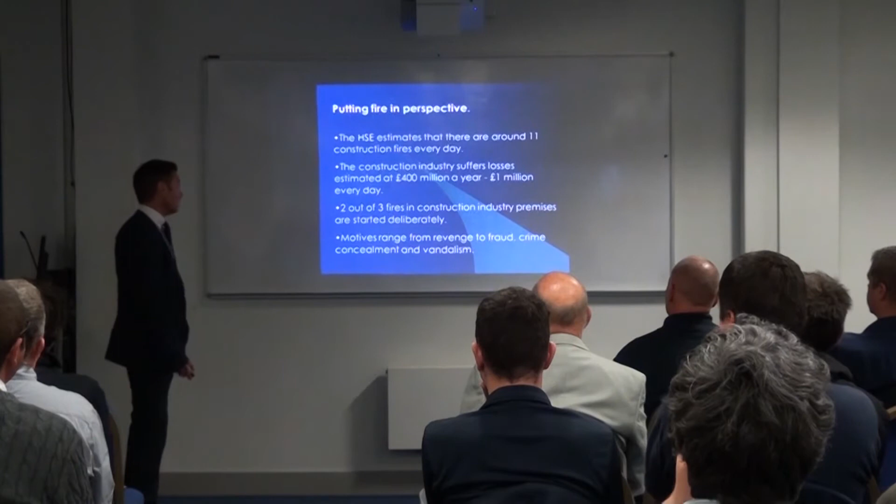So, putting fire into perspective. The HSE estimates there are around 11 construction fires every single day. The construction industry suffers losses estimated at 400 million a year, which is 1 million every day. And 2 out of 3 fires in construction industry premises are started deliberately. Motives range from revenge to fraud, crime concealment and vandalism.

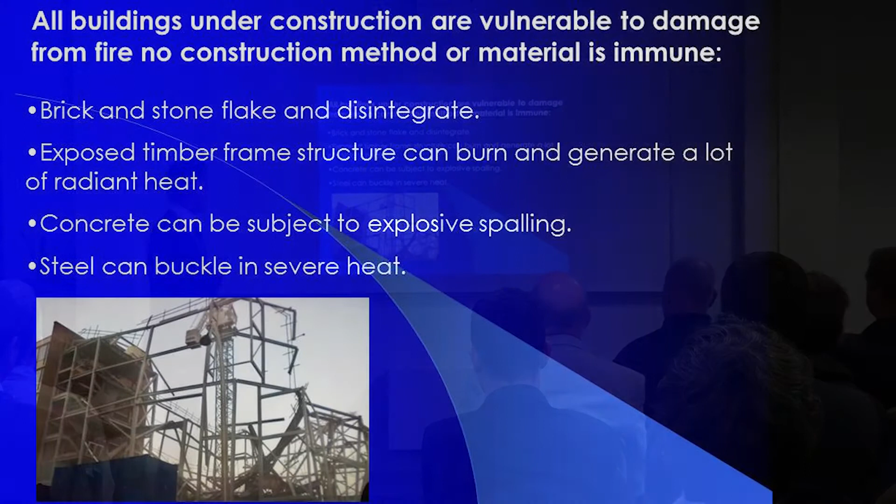So, is it just timber frames that are vulnerable? Well, no. All buildings under construction are vulnerable. Brick and stone flake and disintegrate. Exposed timber frame structures could burn and generate a lot of radiant heat, which is a lot of what I'm going to be talking about today. Concrete can be subject to explosive spalling and steel can buckle in severe heat. So it's not just timber frame, and a lot of what I'll be talking about today applies to all building types, not just timber frame buildings.

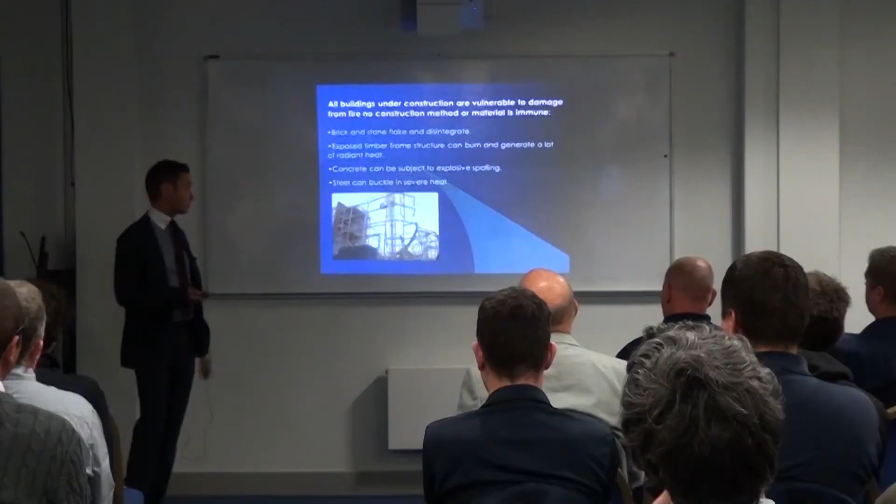Now it's at this point when the timber frame is most vulnerable. Once the timber frame has a plasterboard covering or brickwork on the outside, it's no more likely to catch fire or burn any more aggressively than any other type of construction. However, they are vulnerable during the construction stage.

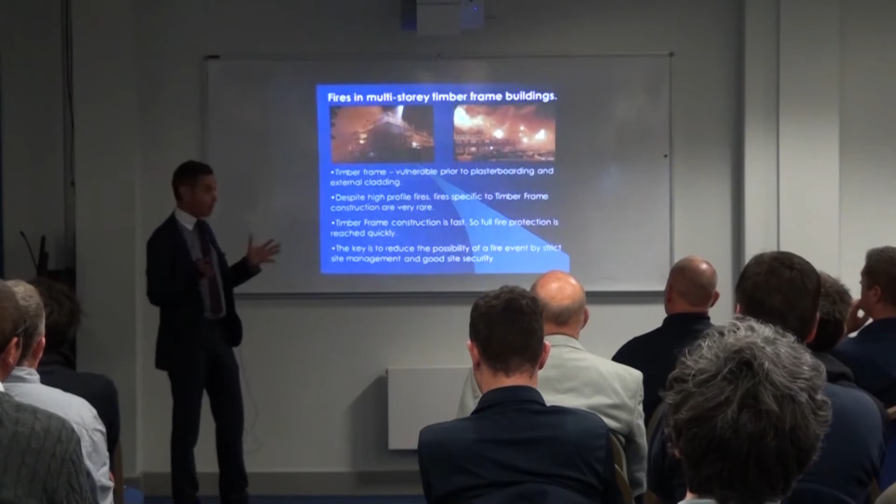But despite the high-profile fires, specific to timber frame construction are very rare. Because timber frame is erected so quickly, it mitigates the amount of time that it's vulnerable to arson attack or otherwise. The key is to reduce the possibility of a fire event by strict site management and good site security.

So, what has the industry done about these fires and the bad publicity that timber frames receive due to these? Well, 90% of the UK timber frame manufacturers are members of the UK TFA, the UK Timber Frame Association. They've just changed their name to the STA, Structural Timber Association, but for this presentation we'll stick with the UK TFA. They've basically looked at producing a document called Site Safe, which is designed to manage the process through the timber frame.

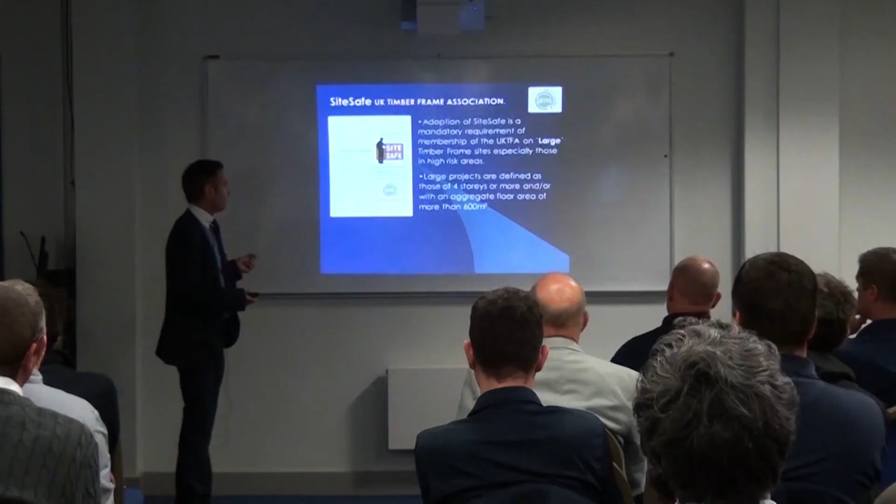But, and there's a big but here, this guidance - and I will say it is guidance, it's now mandatory - is for large projects, defined as those of 4 storeys or more and with an aggregate floor area of greater than 600 square metres.

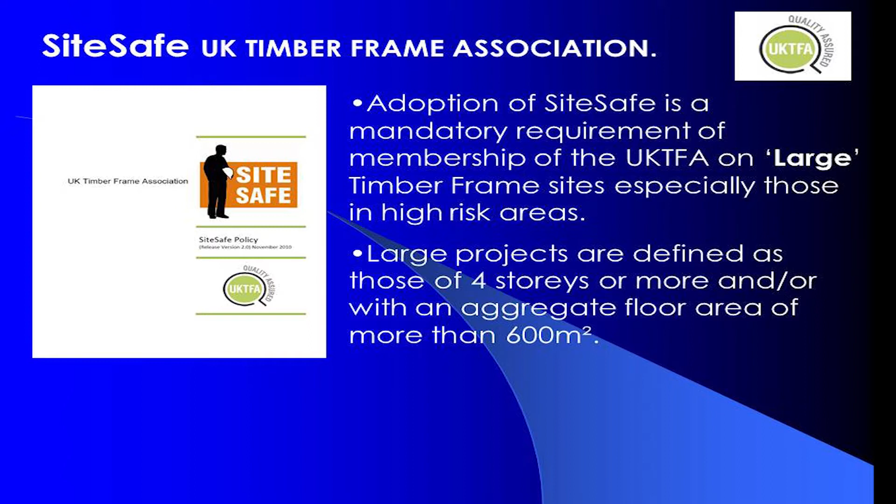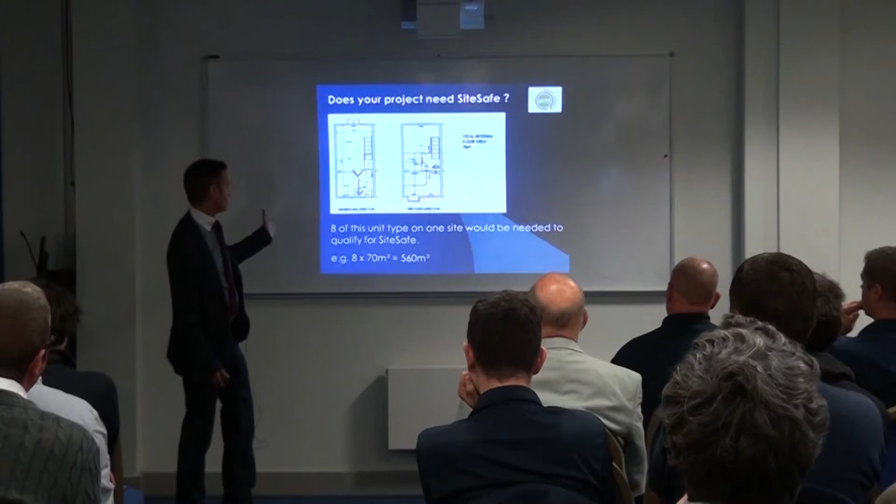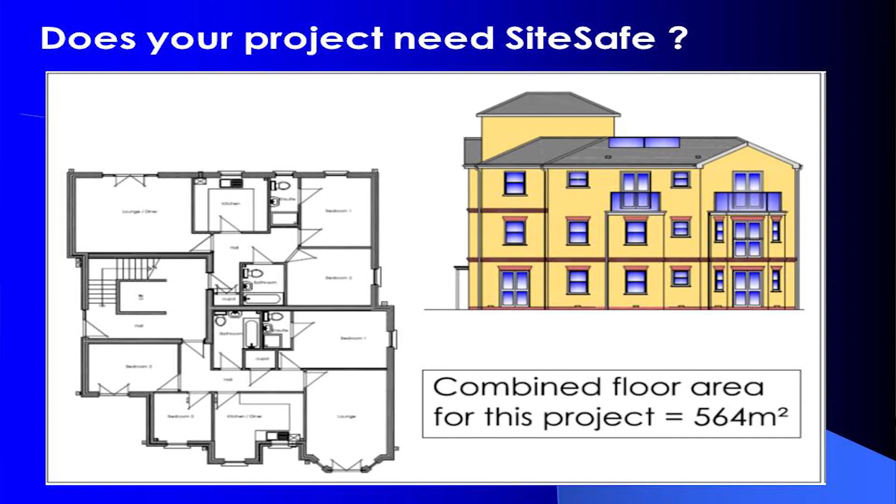So what does that mean in real terms? Well, if you were building fairly straightforward box type houses, you could build 8 of those houses on any given site before you would actually need to introduce or consider Site Safe. Or you can see there 3 storeys, 6 flats, a reasonable sized project. So projects smaller than this don't need to be considered under Site Safe.

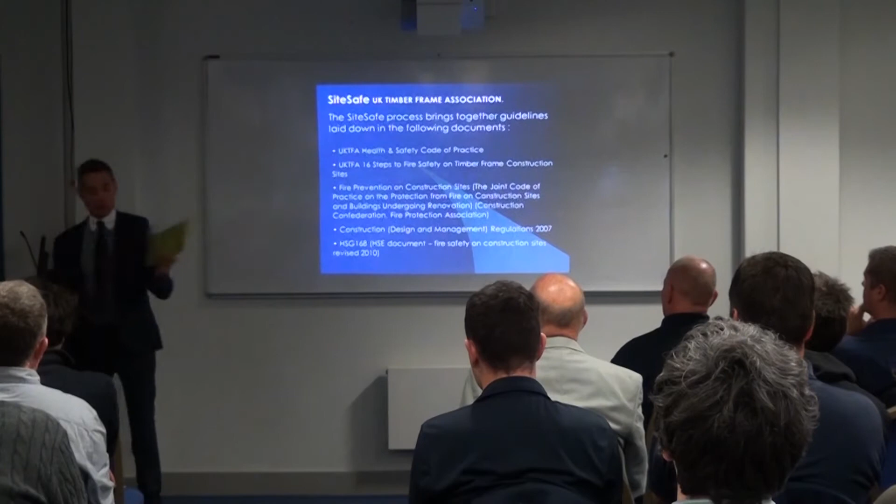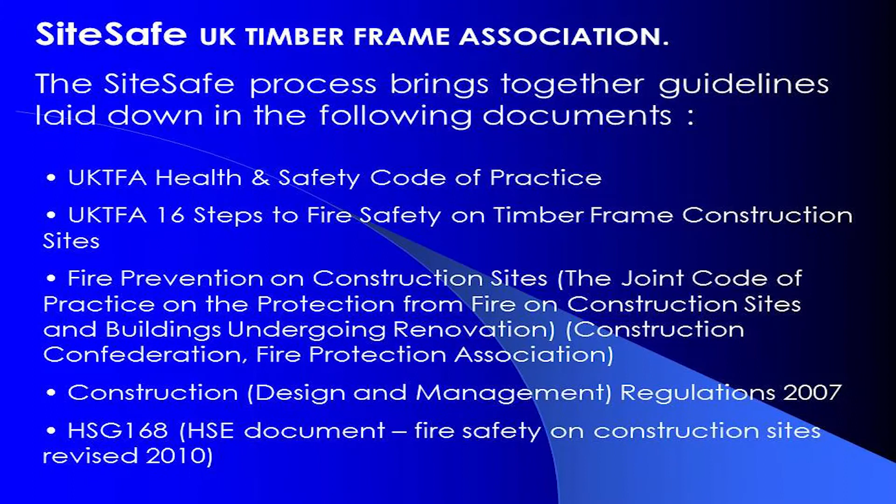So what does Site Safe actually do? The Site Safe process brings together guidelines laid down in the following documents. The first is the UK Timber Frame Association's Health and Safety Code of Practice. The second part is the 16 steps to fire safety, which I'll come onto later in the presentation. The other documents are Fire Prevention on Construction Sites, the good old CDM, which hopefully most of you are aware of, and the HSE document Fire Safety on Construction Sites, revised 2010.

So the guidance is based on documents that are already in place and should be adhered to by the construction industry as a whole, not specific to timber frame.

So moving on, Site Safe is put into 3 stages. The pre-construction planning stage, prior to site delivery, is where we try to mitigate risk in the design process, so this is the important stage for architects and designers. Then stage 2 is when the actual timber frame arrives on site and is erected.

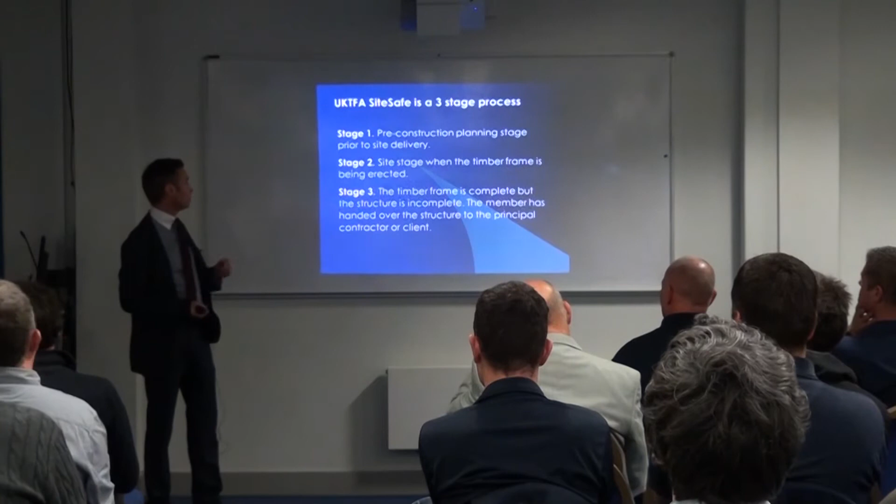There's a 16-step document that I'll be going through that explains that. Stage 3 is when the timber frame is complete but the building is ongoing, so the timber frame erectors have gone, your timber frame's up, but you still need to keep certain fire things in place once the timber frame's finished.

So, pre-construction planning. We've got an obligation now, as a member of the UK TFA, to write to the principal contractor, whoever that may be, to request the CDM coordinator's details. On larger building projects, a CDM coordinator should be appointed. The member must write to the CDM coordinator to inform them of the member's company's identity and notify them that the project falls within the scope of the site safe rules.

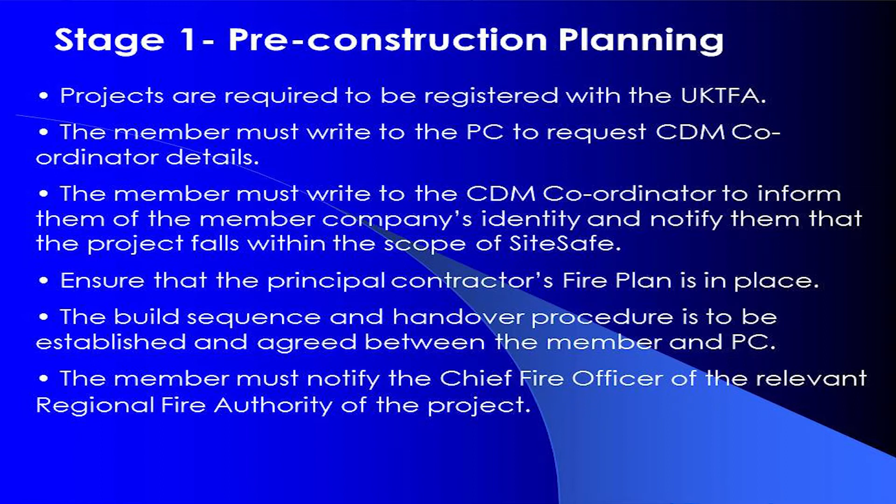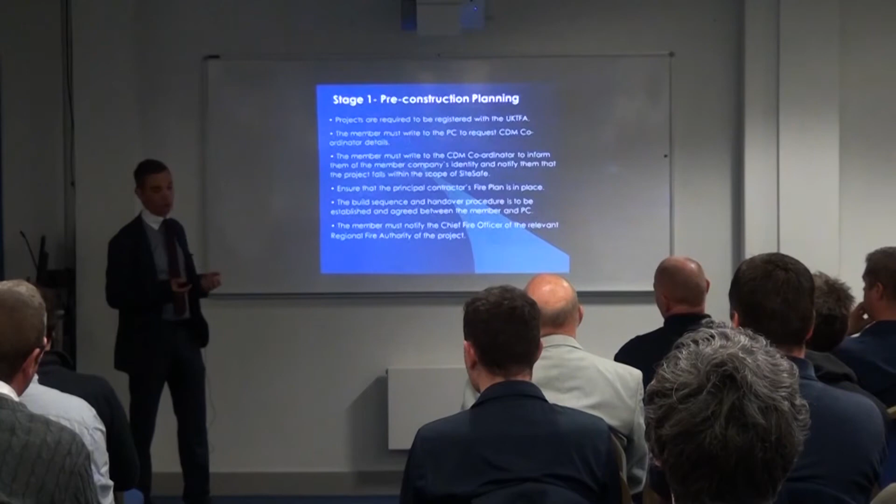They must ensure that the principal contractor's fire plan is in place. The build sequence and handover procedure is to be established and agreed between the member and principal contractor, and the member must notify the chief fire officer of the relevant regional fire authority of the project. That's done as an automated process now online. Any project bigger than 600 square metres or more than 4 stories, we have to notify the regional fire authority, and that's done through an online process.

So I mentioned the pre-planning construction stage, which is relevant to architects and designers. I mentioned before the Peckham fire, the problems with radiant heat. So the idea is to mitigate that, is to design buildings that are either at a certain distance away from neighbouring buildings, or they're fireproof to an extent they can be, so the distances can be reduced.

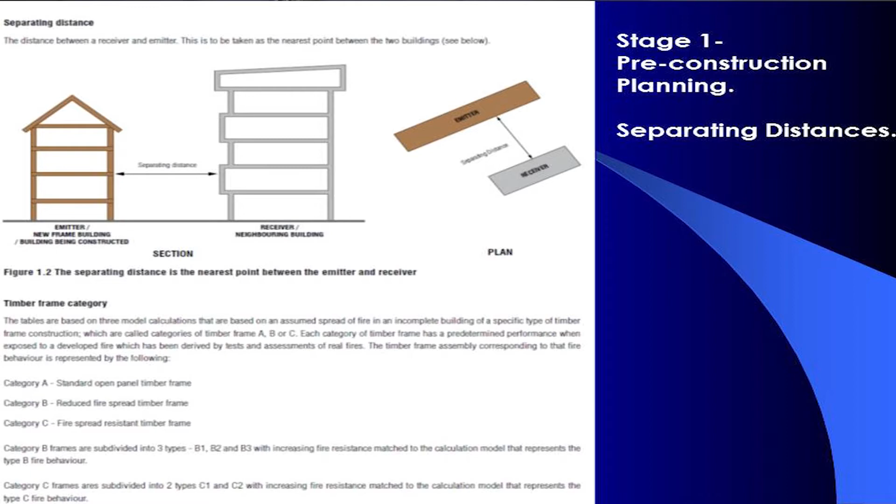As it's set out in the document, you have an emitter and a receiver. The emitter being the building that could potentially catch fire, and the receiver being the neighbouring building nearby. Within the code they've broken it down into 3 categories. Category A is a standard open panel timber frame construction, which is what most people are used to - basic, straightforward stud panels, OSB sheathing, joists, whatever they may be, metal web, I-beams, softwood. So that would be the standard category.

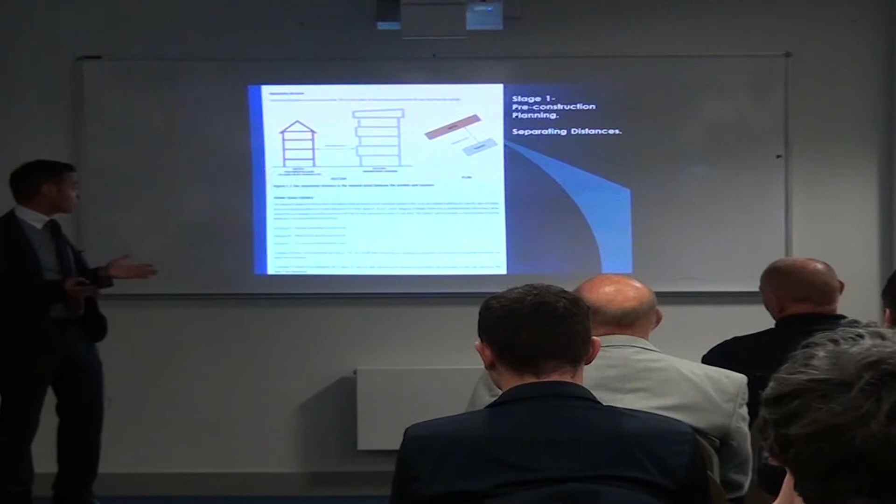They then go for a category B timber frame, which is a reduced fire spread timber frame, which I'll lead on to, and a category C, which is a fire spread resistant timber frame. Categories B and C are subdivided into smaller categories, B1, B2 and B3, and category C into C1 and C2, but I'll come on to that on the next slide.

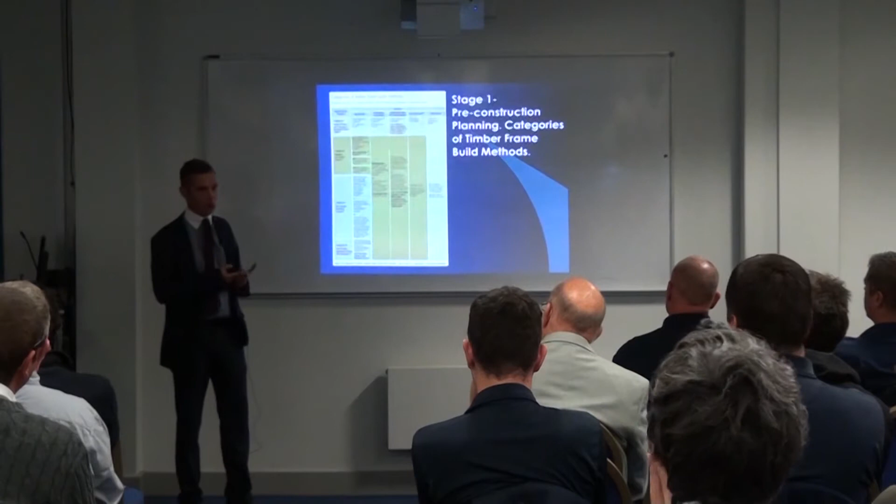I won't go into the floors at this stage, I'm going to run out of time, but then you've got category C, which has 3 options, but the basic option, I think the option that most timber frame suppliers are going to actually adopt, is the use of a non-combustible board to the outside of the frame, such as a Thermocell or one of the magnesium-based boards that can be applied to an OSB. Category C gives the best fire spread resistance, and we think by just simply changing the OSB we traditionally use to a different type of non-combustible material on the outside of the panel mitigates most risk, and that's borne out in the tables that you're just about to see.

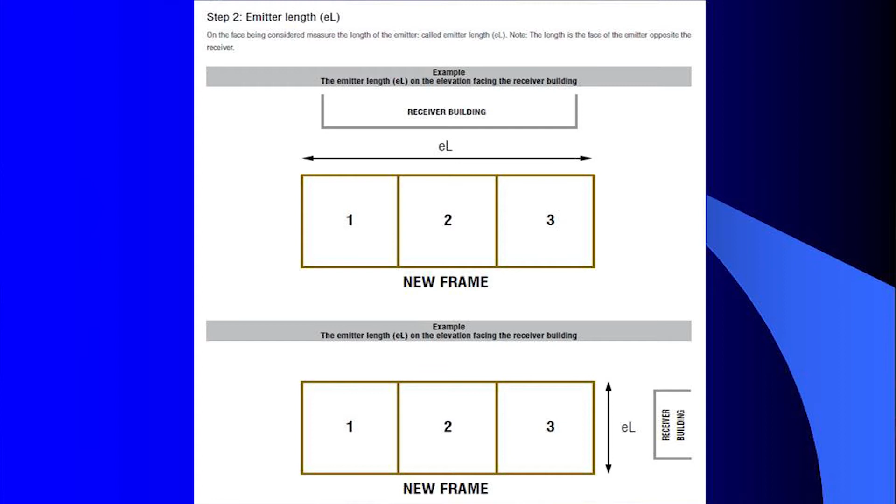So going forward, how the calculation works. A new timber frame building in plan - EL represents the emitter length, so the emitter length has got to be considered. You're looking at a building, for argument's sake, that's 14 metres long. At this stage we don't know the distance to the receiver building, but using their charts - this is for a category A timber frame - you can imagine your site plan, you've positioned your building, you're looking around seeing what adjacent buildings there are.

If the building was 14 metres long, so greater than 10, less than 15, and 3 storeys, we arrive at a distance of 16 metres minimum between your new timber frame and neighbouring properties. Now that's a significant distance. Most sites you'd expect a building to be within 16 metres of you. So in this situation, using a category A frame, you're probably not going to comply for most sites, so then you need to consider other options.

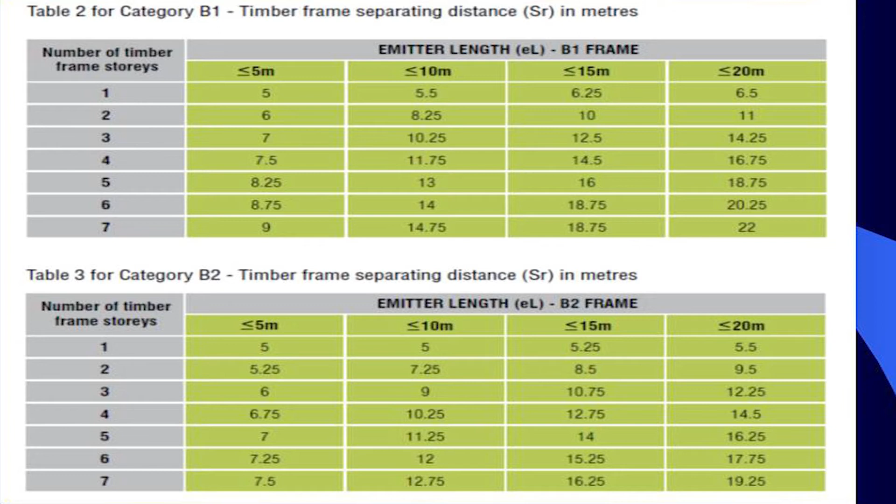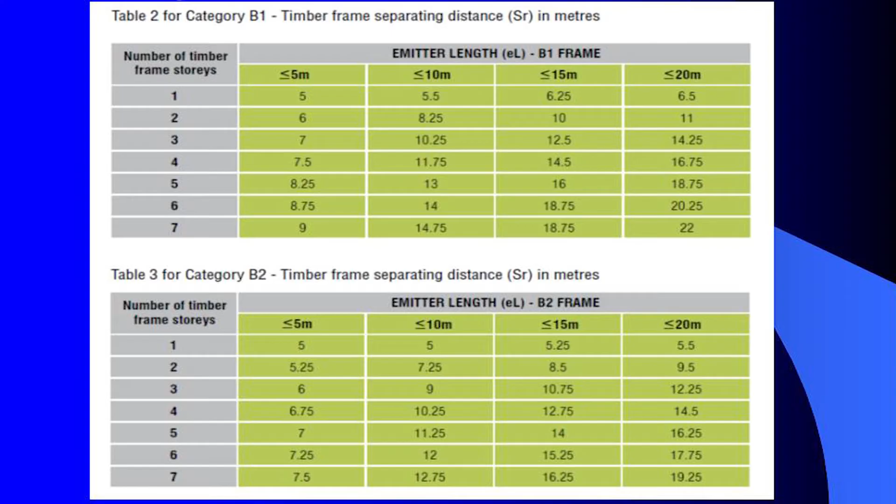Looking at a category B1 frame, so a fire retardant stud with a semi-combustible sheathing, if you apply the same rules, 15 metres, 3 storeys, you're looking at 12.5 metres between your emitter and your receiver building. A B2 frame is pretty much the same as a B1, but with the addition of additional insulation in between the studs, so you get slightly better values. Again, using our rules, 15 metres, 3 storeys, if you're using a B2 type frame, you can be 10.75 metres away from the neighbouring building.

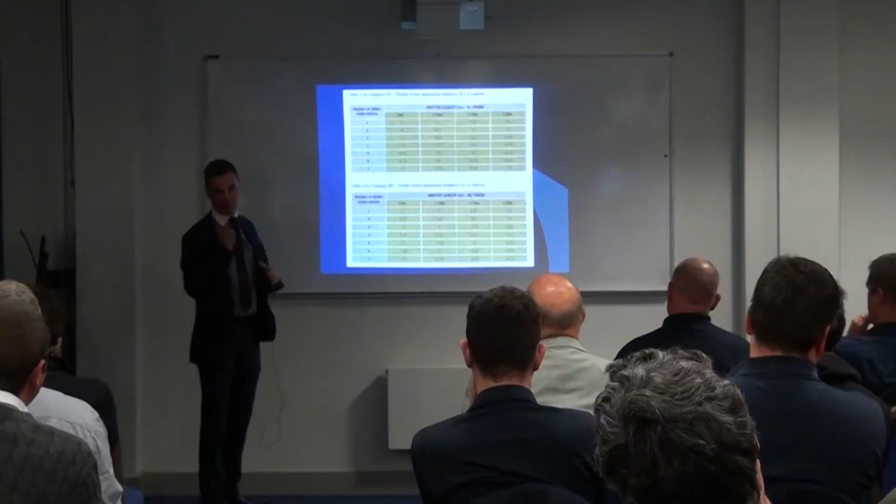Having said all that, I don't think many people are going to adopt a B1 or a B2 frame in a situation that's vulnerable to fire. I think people are going to be looking at - Sydenhams are certainly looking at - a type C1 or C2 frame. So a type C1 frame, non-combustible material to the outside, will give us, at 15 metres, 3 storeys, a distance of 5.75 metres away from neighbouring buildings. So looking at that, you'd think most neighbouring buildings on typical sites are going to be at least 5.75 metres away, so we have fairly comfortable compliance. But you may ask, what happens if we're building hard up against another building, or within a metre or two, which does happen in built-up areas?

Well, then we'd introduce a category C2 frame. A category C2 frame is exactly the same as a C1 frame, but the openings are sheathed over. So any window openings, apertures within the external envelope are sheathed over completely. Now, that creates problems in itself with the means of escape and light within the building. But you've got to think, if I'm tight up against another building, I'm not going to have any windows, or it's unlikely I'll have any openings in that elevation. The C2 only has to be adopted for the elevation that adjoins the other property and for 5 metres back on the flank walls. Then you can go back to adopting your C1 frame.

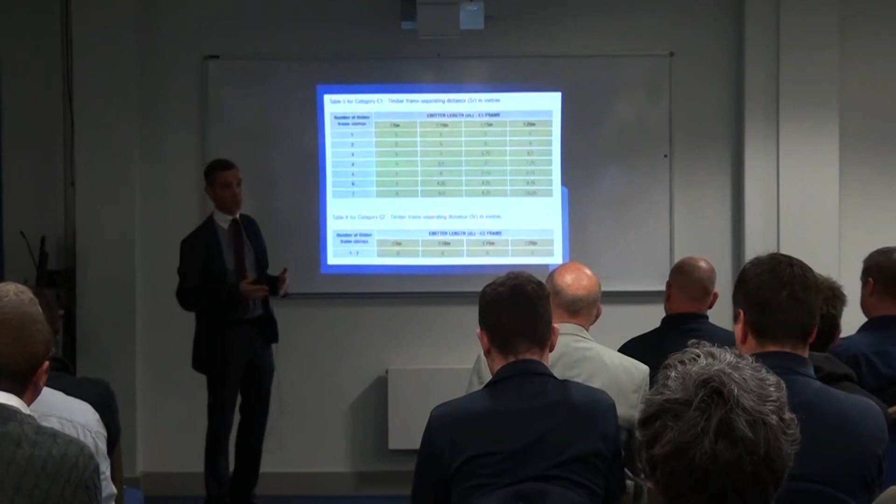So if you liken it to, say, the block industry - what we're having to do is come in line with new regulations or guidance, and the way we're doing it is to change possibly one or two of our products. The block manufacturers, for different reasons, thermal reasons perhaps, have had to introduce different materials in addition to their normal blocks - thermal boards, extra insulation. So all we're doing is improving our product to come in line with the guidance set out by the UK TFA. What we think is going to be a fairly minimal cost.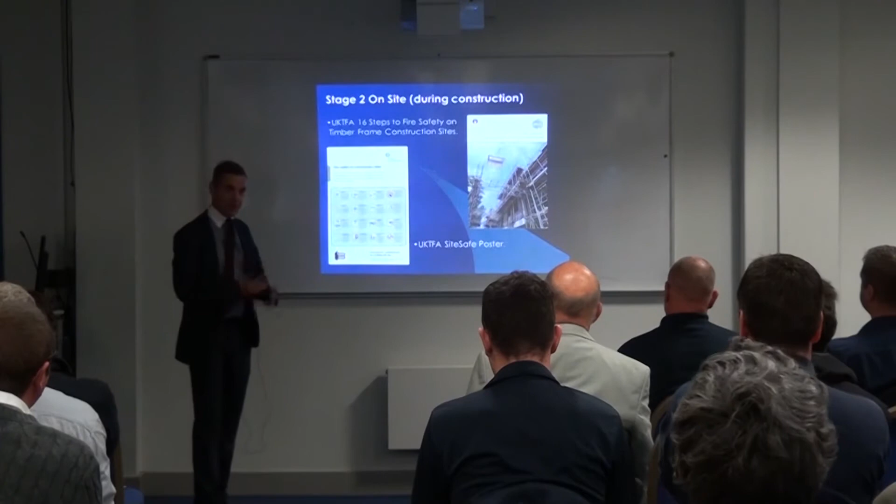Okay, that in a nutshell - it is a bit more involved than that, but in a nutshell - is the pre-planning stage. Now, I'm going to apologise in advance if this gets a bit wordy, this section. It's very difficult for me to quote 16 steps without actually reading verbatim at times.

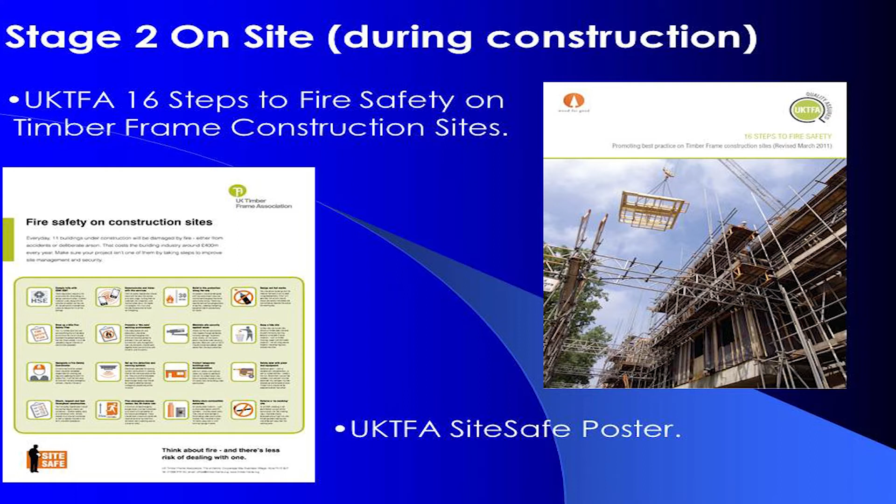But this is the point of the project where you're actually starting on site erecting the timber frame. And a lot of what you'll see within these 16 steps is not specific to timber frame. It's in your CDM regs, it's in your fire safety in construction HSE regulations. It just so happens that it's been highlighted and included in the SiteSafe policy. We should all be doing it on all sites anyway, on larger projects. Okay, so just a flow chart there of the 16 steps.

Okay, step 1 is to comply with CDM 2007, which I believe is being updated and is going to be released again next year. The Construction Design and Management Regulation 2007, CDM, came into force in Great Britain on April 6th, 2007. It applies to all construction projects where people are at work, so not specific to timber frame at all. It places legal duties on virtually everyone involved in construction work, and compliance includes producing a risk assessment for the site, its design and construction, covering the use of any building material - again, not specifically timber frame - and assessing the fire risk and potential for damage to ensure these are kept to a minimum during construction.

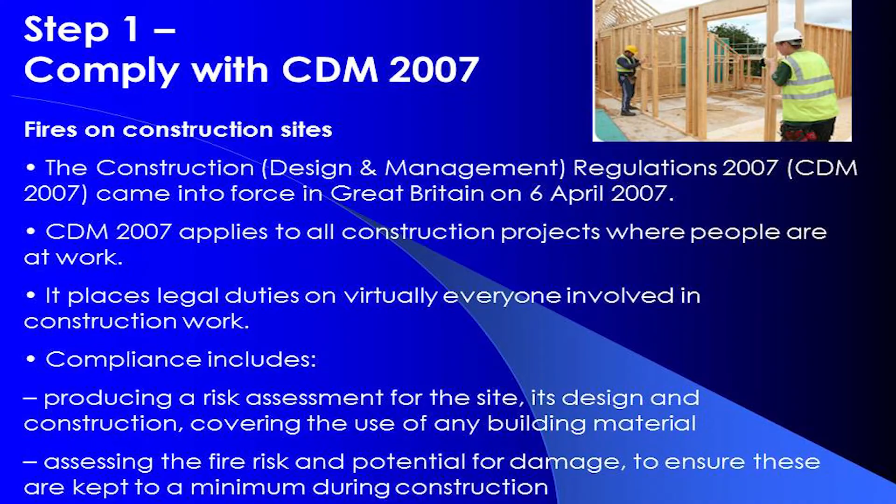The other obligation is to appoint a fire safety coordinator. We think it's best practice for the fire safety coordinator to be appointed for all construction sites. Large projects should also have a fire marshal and deputy fire marshals, and under CDM regulations every construction project should have one duty holder responsible for creating and regularly updating the fire safety plan. Again, I would imagine this is something we should all be doing.

At times we just don't consider it. It is vague in the document as to what stage these things need to happen. They refer to it often as a larger building project, but nevertheless it's something we all need to be aware of. We recommend that the person is also the fire safety coordinator, whose role includes liaison with local emergency services and other duties.

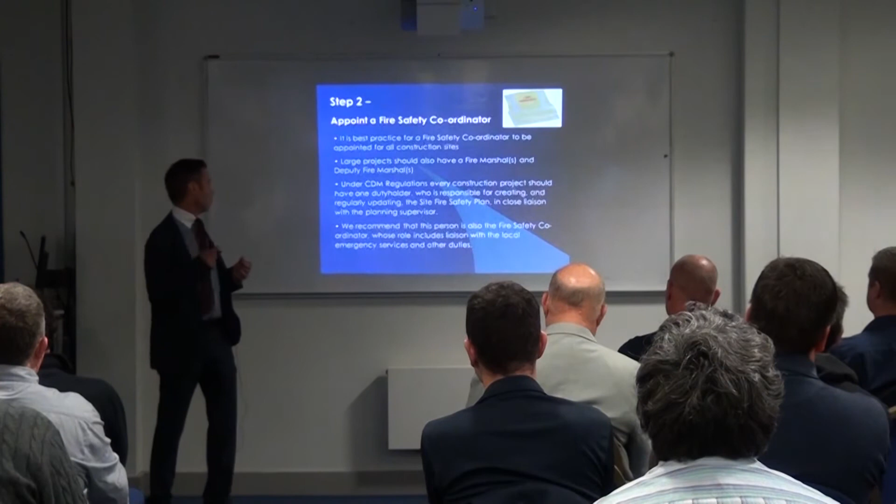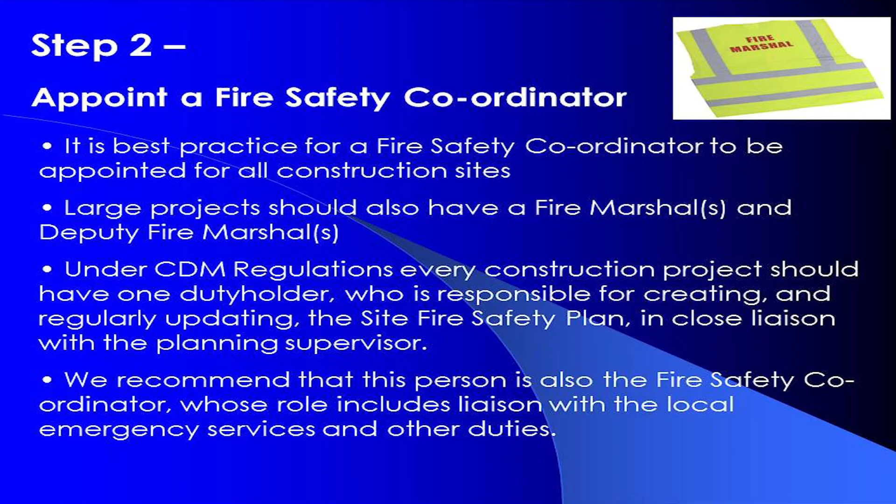Step 3, you should all produce a fire safety plan. This is a written plan setting out everything to be done on the project to minimise the risk of fire and protect the people working on site. It must be updated at regular intervals during construction and whenever significant design changes occur. During construction, it's the responsibility of the principal contractor or the fire safety coordinator to ensure that all procedures, precautionary measures and safety standards in the plan are clearly understood and complied with by everyone. Again, you can refer to the Joint Code of Practice for more information.

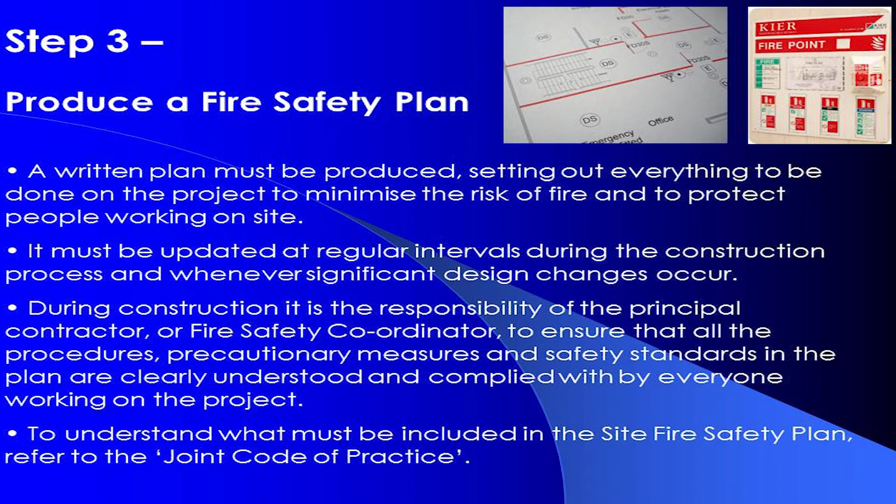Step 4, check, inspect and test during the construction process. The way the document reads, as long as there's a system in place for checking, it doesn't matter if it's daily, weekly, or at the end of each day or shift. On certain larger projects where 24-hour security is required, fire checks should be done throughout the night, as well as during holiday periods and weekends, times when the buildings are obviously most vulnerable.

A lot of this, as I said, is guidance. Don't be frightened into thinking you've got to have site security on every building project you do, or even some of the larger ones. If you're building in the middle of London, you would be thinking to yourself, well, site security is probably a reasonable thing to have. If you're building a block of flats in Brighton, then you're not going to be considering 24-hour site security. Again, it's all about keeping and maintaining records, fire drills and other procedures.

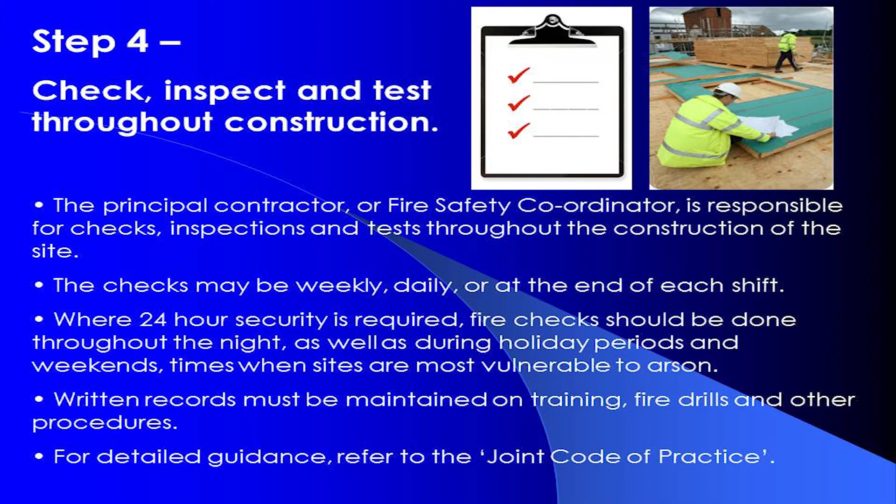Communicate and liaise, step 5. Effective communication and regular liaison with other parties such as emergency services and security personnel is extremely important in assessing and managing potential risks during construction. The principal contractor or fire safety coordinator on any site should liaise with the local fire service at an early stage to invite them to undertake site inspections and familiarisation tours.

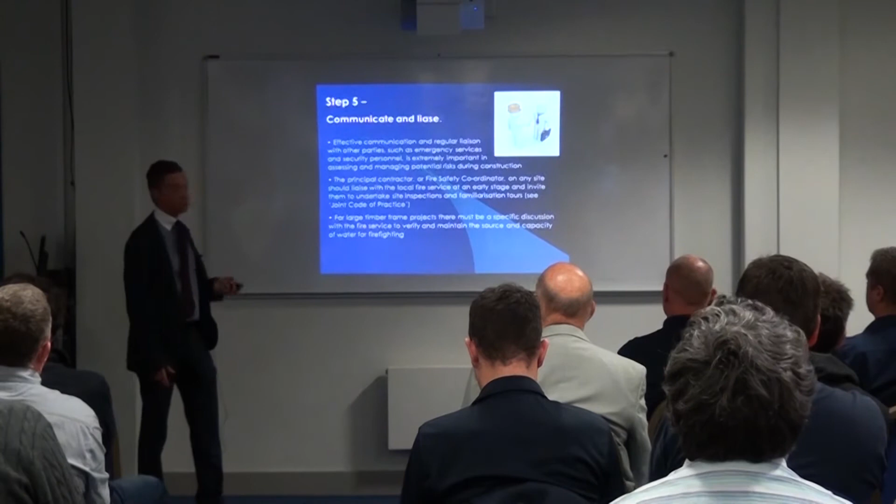For large timber frame projects, there must be a specific discussion with the fire service to verify and maintain the source and capacity of water for firefighting. Fairly obvious things, really.

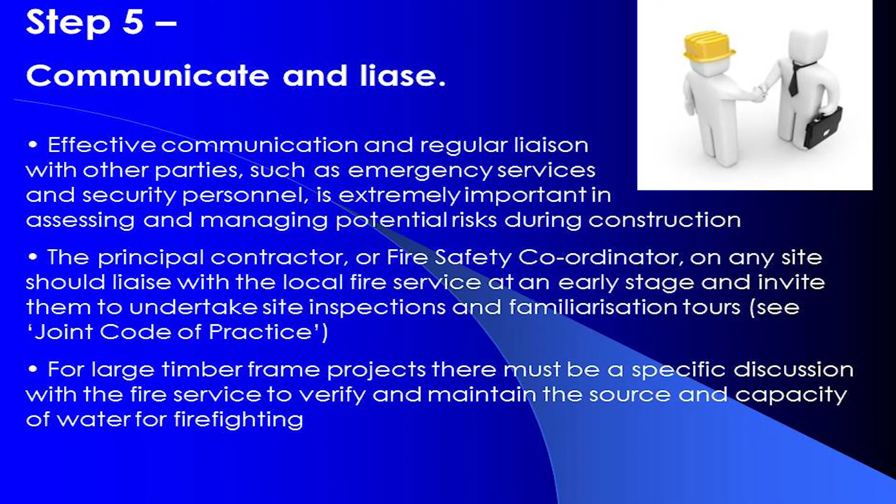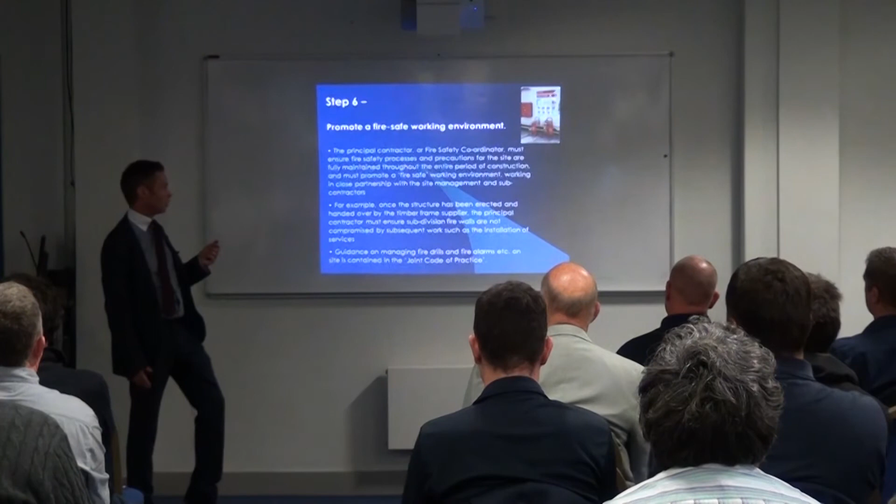Step 6, promote a fire-safe working environment. Again, all these things should be done on every site, not just timber frame. The principal contractor or fire safety coordinator must ensure fire safety processes and precautions for the site are fully maintained throughout the entire period of construction, and must promote a fire-safe working environment, working with site management and subcontractors.

There's also a point I mentioned earlier at which the building is handed over by the timber frame company, the frame's finished and erected, and at that stage, if things like subdivision walls or fire break walls have had to be introduced, that has to be maintained. Just because the timber frame guys have come away from the site doesn't mean those things should not be kept in place.

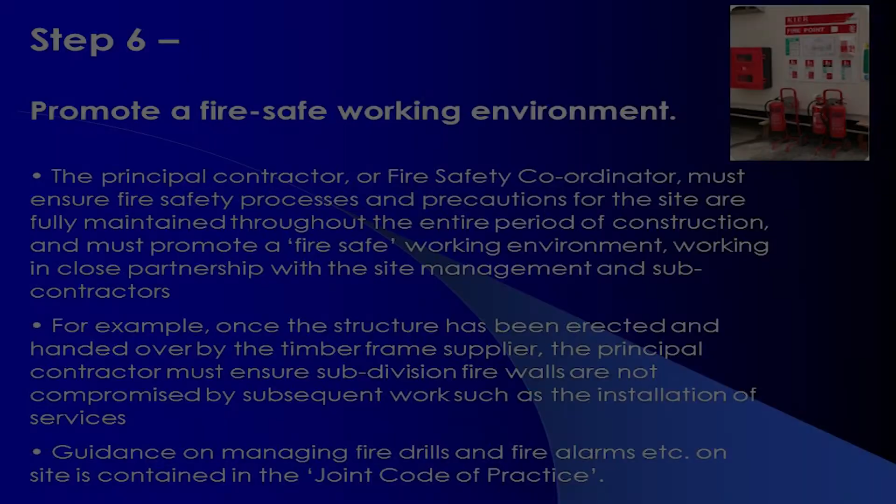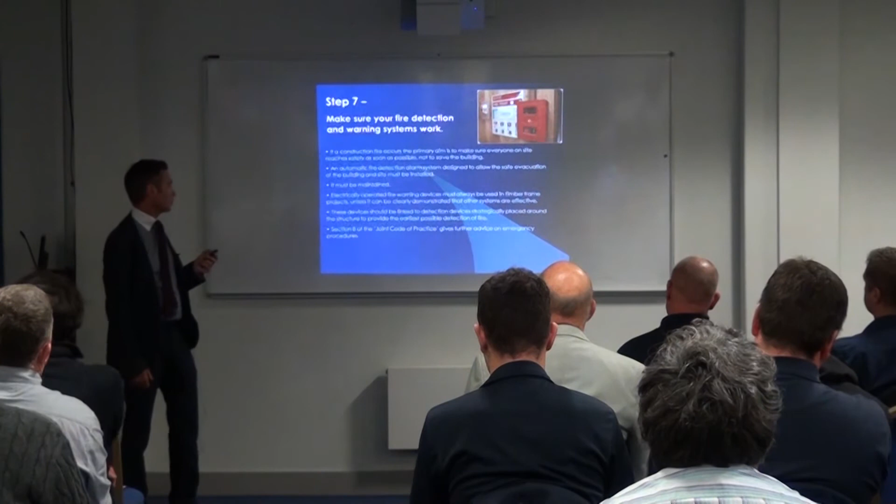Step 7, make sure your fire detection and warning systems work. I'm not going to read all the way through that one, I think it pretty much says it at the top there. But the important things are that it must be maintained, and they should be linked to detection devices strategically placed around the structure to provide the earliest possible detection of fire.

Okay, step 8: protect emergency escape routes, the 35-metre rule. This rule isn't specific to timber frame, it's a general rule, but I wonder how many of us actually consider this when we're designing a building or working on site.

A window, as an example, in each apartment can provide an escape route as long as it goes onto a scaffold and then down through a ladder. But the way the system works is you've got 35 metres to either an escape stairwell or the ground.

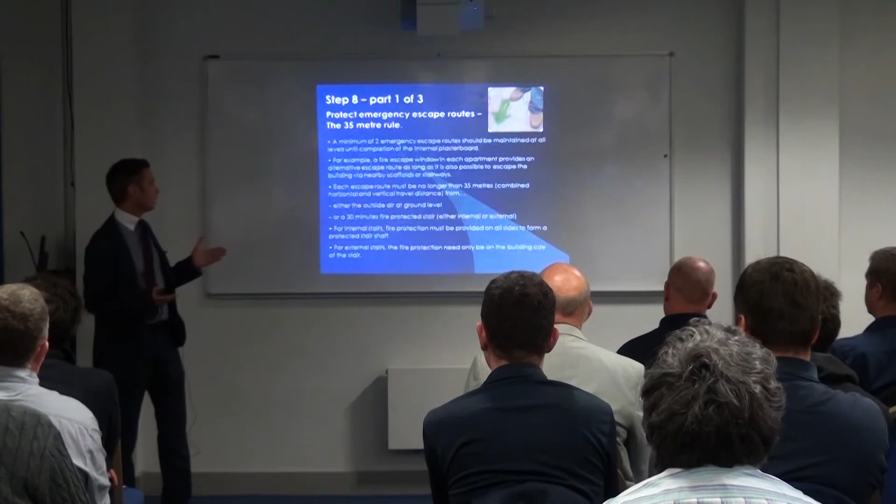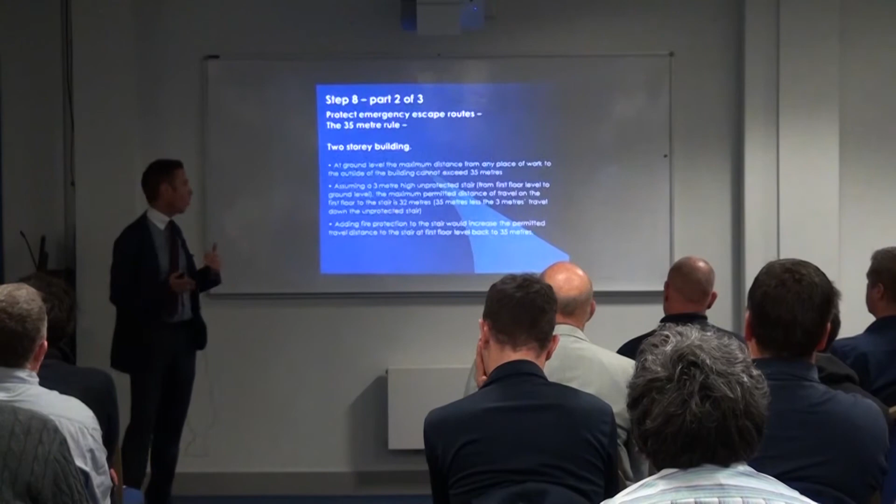At ground level, the maximum distance for any place of work to the outside of the building cannot exceed 35 metres. So assuming a 3-metre high unprotected stair from first floor level to ground level, the maximum permitted distance of travel on the first floor to the stairs is 32 metres, so 32 plus your 3 metres down your ladder.

Unless you create a fire escape route down through the building, which can either be internal or external, but it has to give half-hour fire protection down through. That way, your 35-metre rule applies to the head of the stairs.

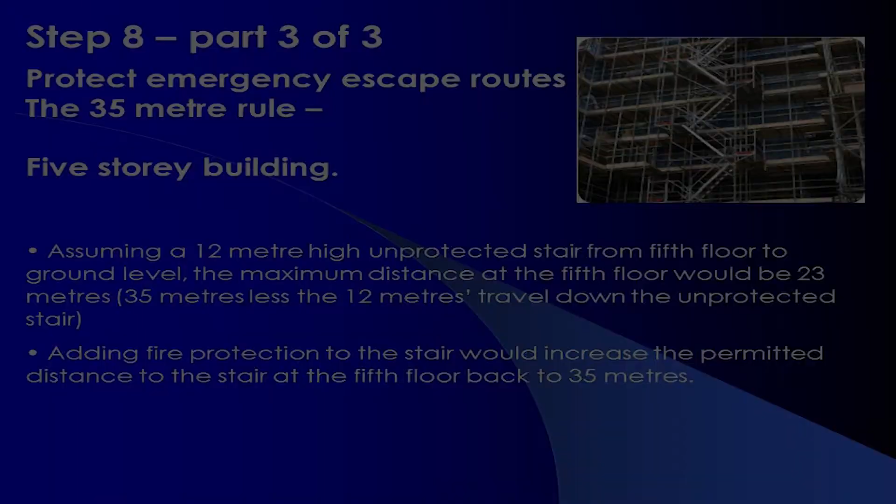Building in fire protection from the beginning is something that needs to be done at design stage to a degree. It sounds onerous, but in actual fact, most buildings are naturally divided up with separating walls and party walls. Flats, for instance, you're unlikely to get a run of panels or a distance in a building within sort of 20 metres without a natural fire break, a separating wall. But it's something that needs to be considered in the design process.

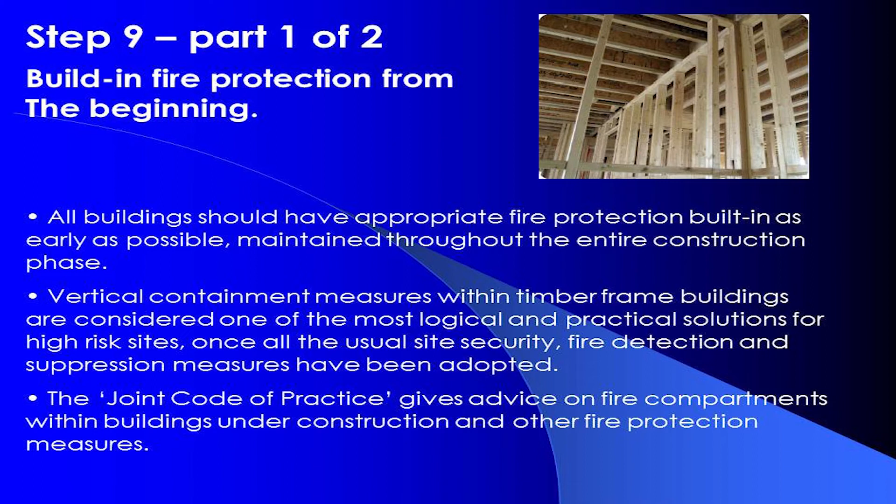The biggest factor with fires throughout our industry is arson, by far. So guidance should be sought at the earliest stage from the local fire service and police on the risks of any particular location. If we're building on the Isle of Wight, our risks are limited.

As a general rule, sites must be kept secure at all times. Access ladders or stairs to upper levels must be made secure at the end of each day. Other possible access points such as windows should be made secure as early as practical in the construction programme. Early plasterboarding and fireproofing of the ground floor level is also recommended.

Recommendations can be given on a range of security solutions, including the safe storage of materials and site staff training, and CCTV and overnight lighting could be introduced on larger projects. To help assess what security features are most appropriate for a timber frame site, refer to the risk assessment flowchart in your documents.

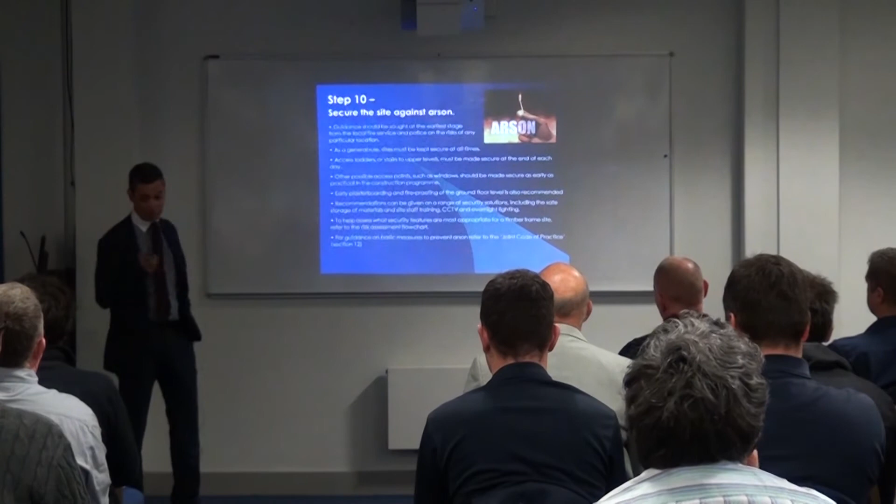Sorry about these steps, some of them are obvious. Temporary buildings on site - temporary buildings and accommodations such as site huts, offices, materials stores should be protected and ensure they do not create an additional fire risk.

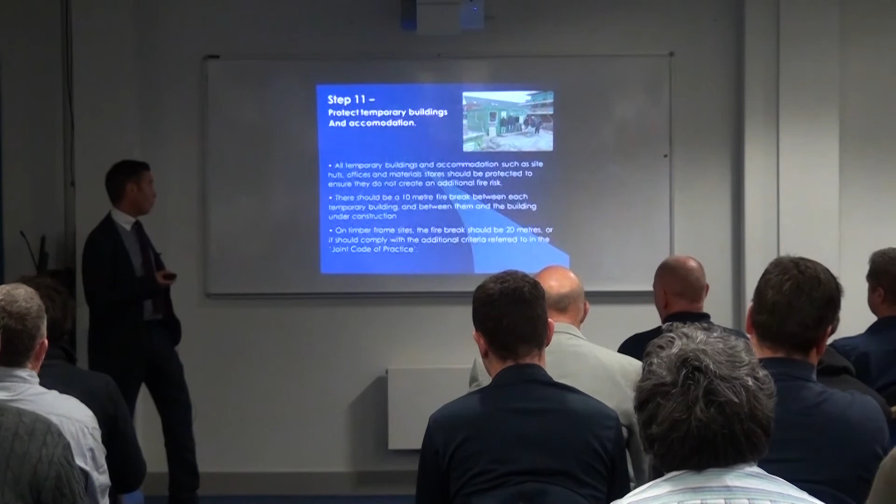There should be a 10-metre fire break between each temporary building and between them and the building under construction. On timber frame sites, the fire break should be an additional 10 metres, taking it to 20 metres, or it should comply with the additional criteria referred to in the Joint Code of Practice.

Another obvious one, storing equipment safely. Safeguards must be put in place for the safe storage of all combustible materials, flammable liquids and LPG cylinders. Highly combustible materials must not be stored within the building under construction - again, fairly obvious, I would have thought. The Joint Code of Practice gives details of how and where to store these materials and the appropriate signage.

Storage areas on all timber frame sites must be at least 15 metres from any building, not just the timber frame building that's being worked on. Containers and drums must not be stored within 6 metres of any building or boundary fence unless the boundary is a wall with at least 30 minutes fire resistance.

If you're using bean bags or fall arrest systems, they have to be fire retardant and they must be removed from the frame when they're no longer needed or being used.

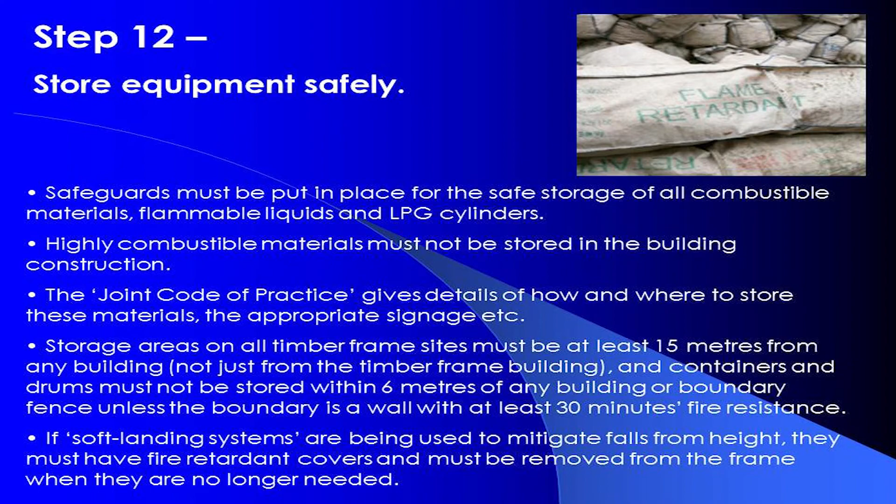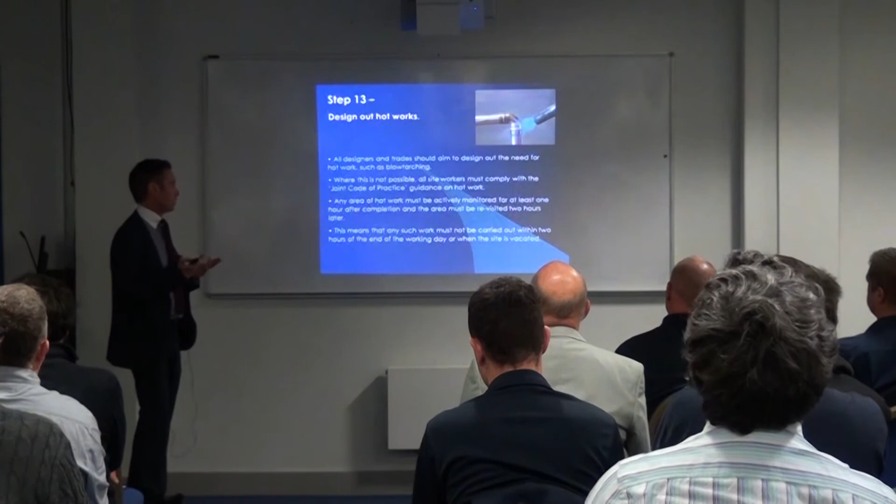Another obvious one applying to all building sites: design out hot works where you can. Generally speaking, this means any such work must not be carried out within 2 hours of the end of any working day, in case there's embers or whatever burning. A fairly obvious one, which I'm hoping you all already know.

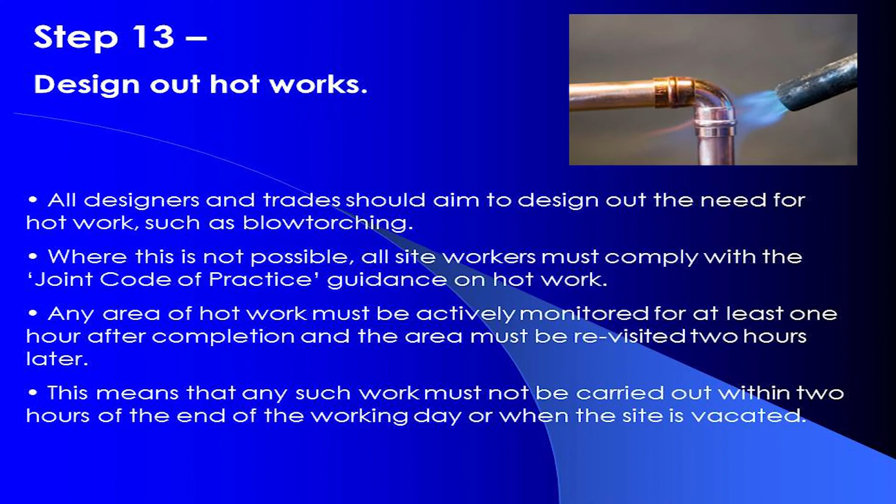Good building practice in general, but also to help mitigate a potential source for fire, is to keep your building sites nice and tidy.

Again, the same applies to plant and equipment. Petrol, diesel power plant should not be used inside a timber frame building during construction unless absolutely necessary. A timber frame building must be protected from any heat generated by working plant. Again, I think common sense factors come into place with this sort of thing.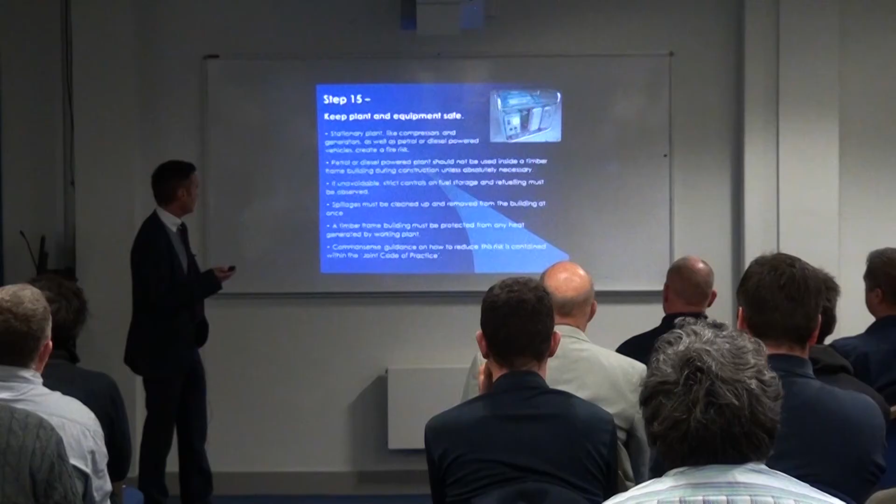No smoking. Again, I don't need to really explain that one.

I mentioned site security, which people always think sounds expensive, having to have a full-time guy on site at night. Well, it depends - the guidance is there as guidance, and you've got to weigh up where you're building and whether there is a risk. The Timber Frame Association has given some guidance here.

For instance, if your timber frame was over 600 square metres, 3 stories or less, and had a maximum overall plan dimension of less than 50 metres, it would recommend security package A. The same flow chart, but with a distance around the perimeter of more than 50 metres, would recommend package C.

Security package A, which is what you should all have anyway I guess, is a non-climbable perimeter fence and locked site and building access outside of hours. But if you go to the extreme of security package C, you're looking at CCTV, permanent security lighting, an out-of-hours watchman, and all ground floor openings sealed.

That sort of security package, in my eyes, would only really be necessary in a really built-up area where there's been a history perhaps of arson. But yes, that's the guidance.

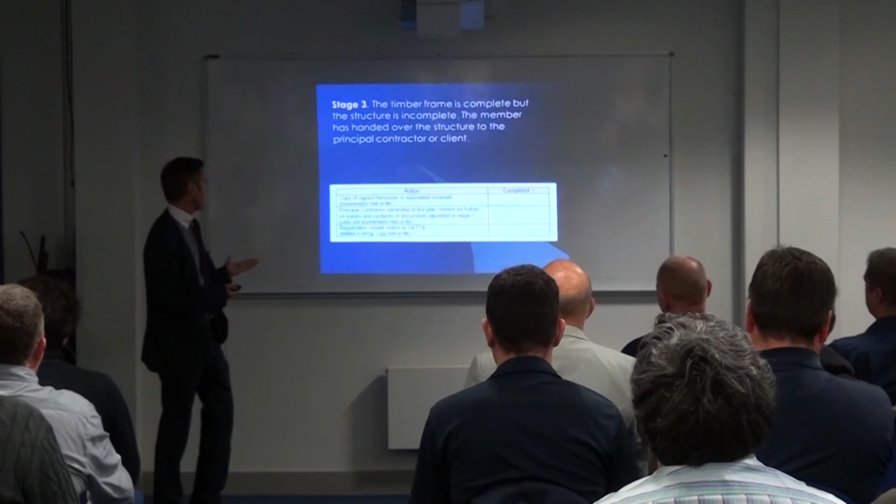The final stage, as I've mentioned before, is the handover. When the timber frame supplier has completed his scope of works, he's basically handing it over to the principal contractor, saying we've finished our work, and recommending that he keeps the fire plan and any fire breaks in place that were put in place for the timber frame. Then we close - we tell the UK TFA that we've finished our responsibility and handed it over to the principal contractor.

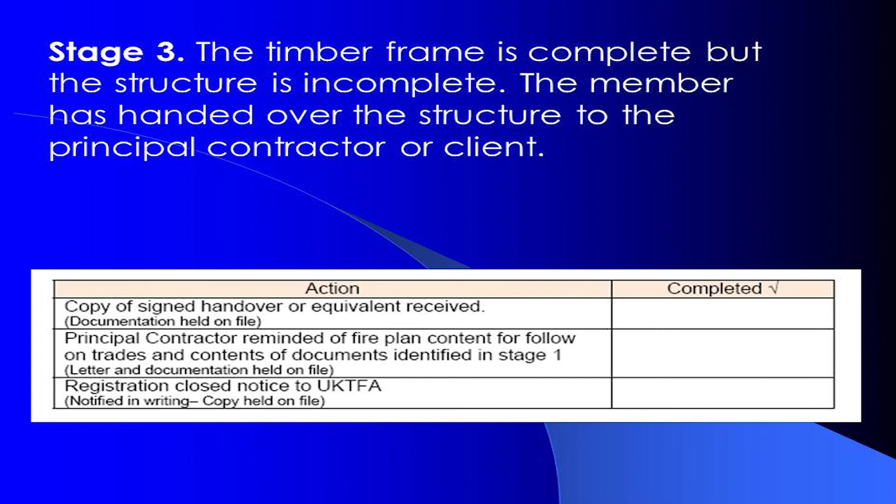So I'm sorry if that was all a bit wordy and techy, but hopefully you're a little bit more aware of the fire risks with timber frames and all types of building construction. As I said earlier on, it isn't just all about timber frame. Most of what I've spoken about today is legislation and guidance from documents that are not related to timber frame, but to all types of building construction.

So, any questions, guys? Going to the sheathing, the external sheathing - fireproofing, is that becoming legislation or is that just good practice?

At the moment, it's guidance only. All of what the UK TFA produces is guidance only, but I think it will become commonplace.

At the moment, there's several different boards out there. Thermosal is one we've used in the past in these situations, which is a very dense board - quite heavy, puts a bit of additional weight on the panel. There are other magnesium boards sandwiched against an OSB sheet, much lighter, being developed at the moment. Some are already in place.

The cost of those, I've got to be honest, at the moment is a little bit high. We're hoping that when the industry adopts these policies and rules as a given, with the benefit of mass production, it should drive the prices down a little bit, so we don't think there's going to be a massive uplift. And what we've all got to remember is this is only for buildings over 600 square metres or 4 stories, which I'm guessing the majority of you guys probably don't do a lot of.